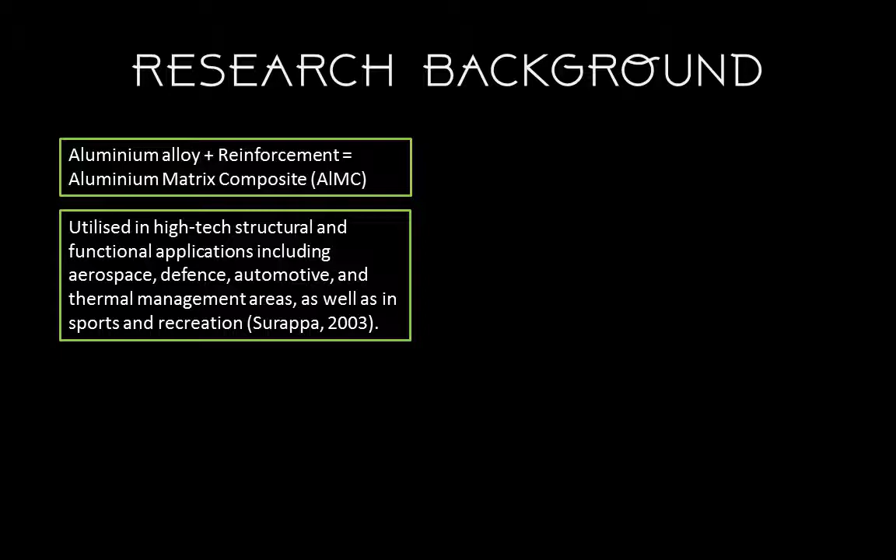Now the question is how to maintain the good standard of aluminium matrix composite. Surely it is to reinforce the matrix with a reinforcing agent that has superior attributes.

Carbon nanotubes have been in the limelight as an ideal reinforcing agent as it is ultra strong because of its ultra small size, enhancing the mechanical properties by transferring loads from the metal matrix to CNT, which is called fine grain strengthening. So the next question: how to fabricate a CNT reinforced aluminium matrix composite that is up to its high standard?

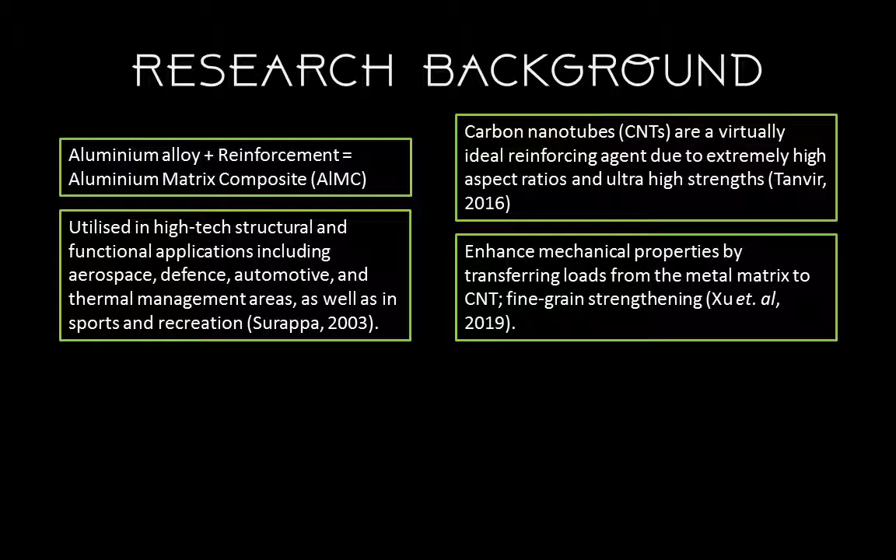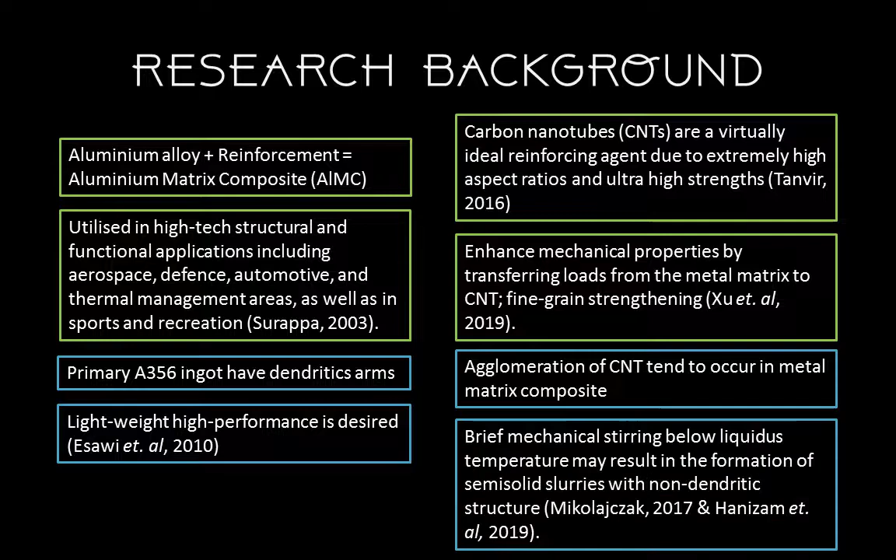CNT tends to agglomerate, and the primary A356 ingot has a dendritic arm structure, while lightweight and high performance is desired. Studies from previous researchers show that mechanical stirring will solve the above problem.

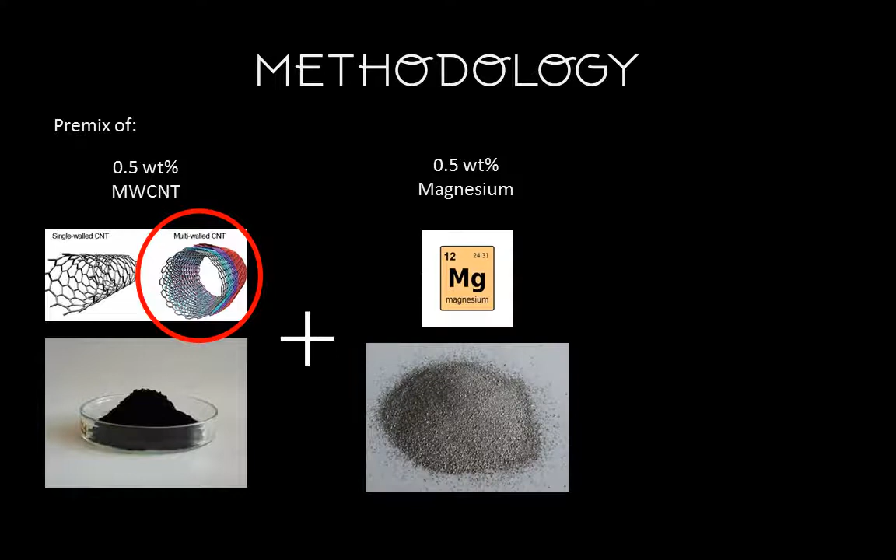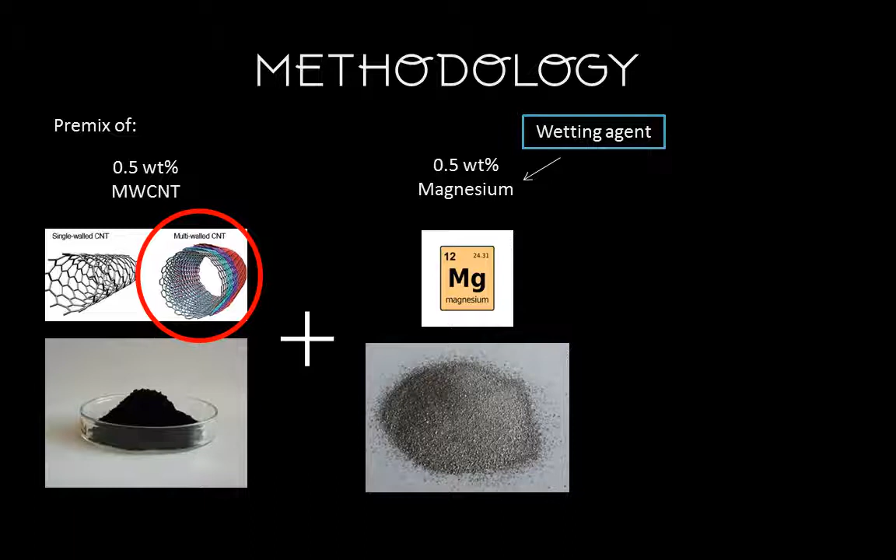Now we will move on to the methodology. First step is to premix 0.5 weight percentage of multi-wall carbon nanotubes with 0.5 weight percentage of magnesium. The purpose of magnesium is as a wetting agent to bridge the carbon nanotubes to the metal matrix, and both materials will be encapsulated in aluminium foil.

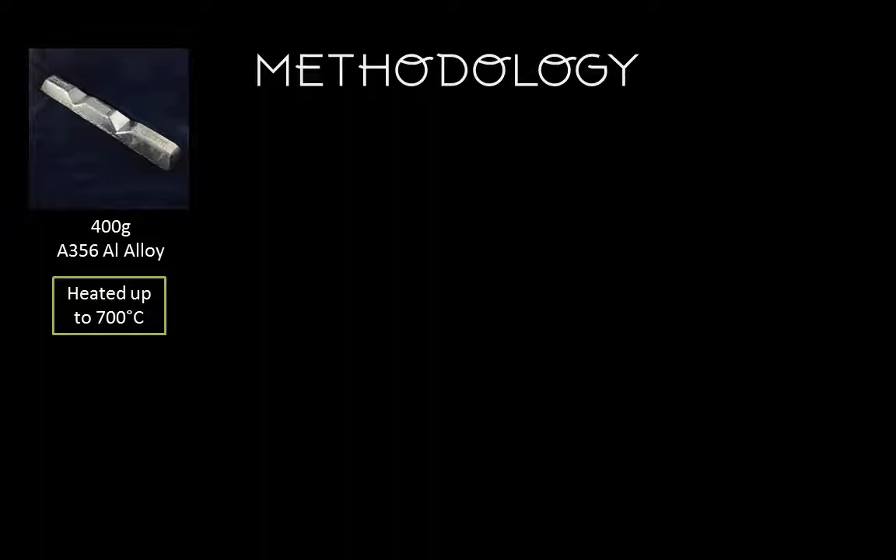The next step is to have 400 grams of A356 aluminium alloy heated up to 700 degrees Celsius before it was brought down to a constant temperature of 650 degrees Celsius. The reason for it to be heated up to 700 degrees Celsius is to ensure that it is fully melted.

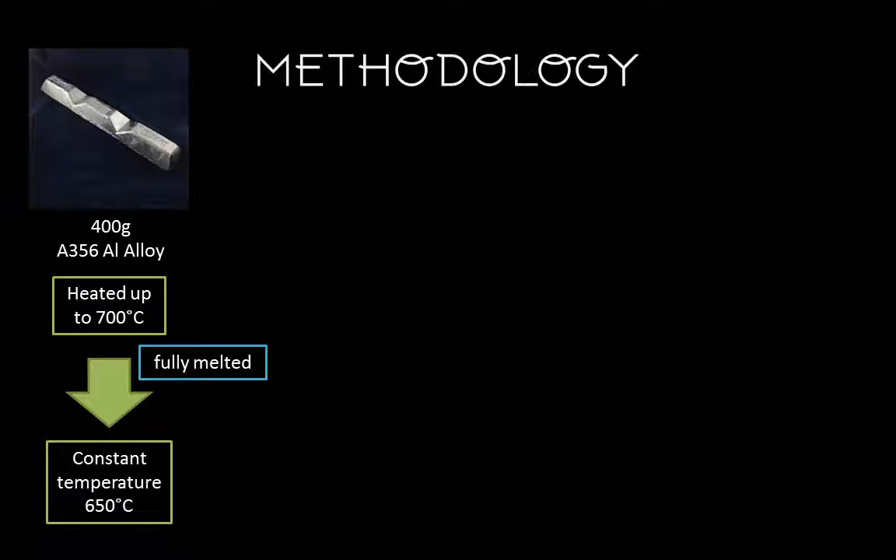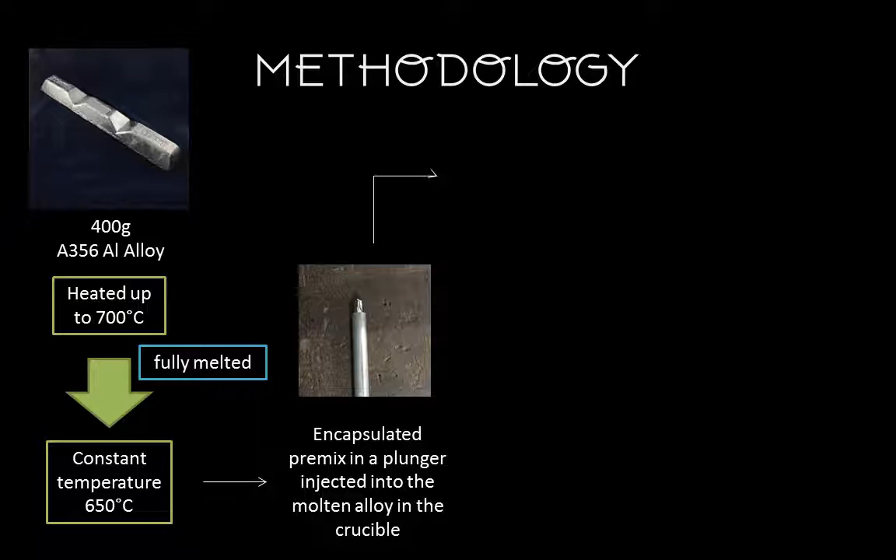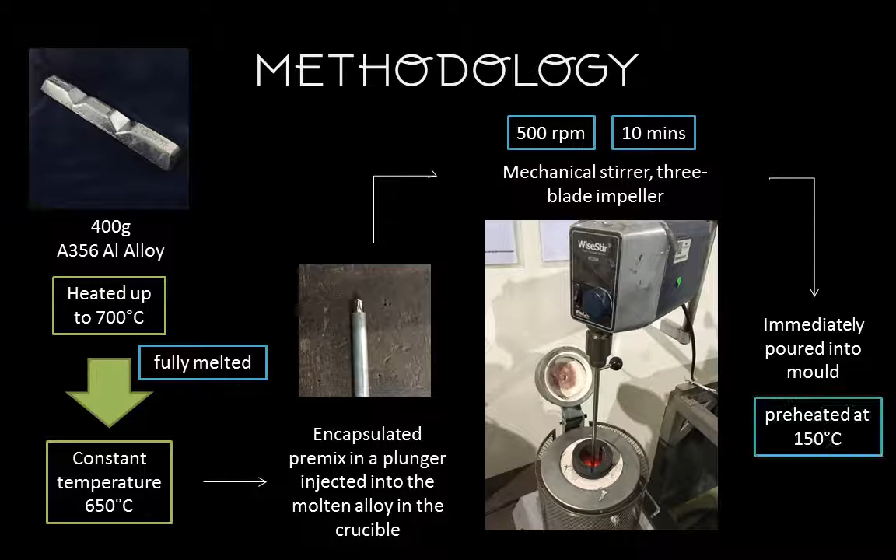The next step is to have the encapsulated premix put into a plunger and injected into the molten alloy in the crucible before it was mechanically stirred using a mechanical stirrer equipped with a 3-blade impeller for 500 rpm. After 10 minutes, it will be immediately poured into a mold which is being preheated at 150 degrees Celsius.

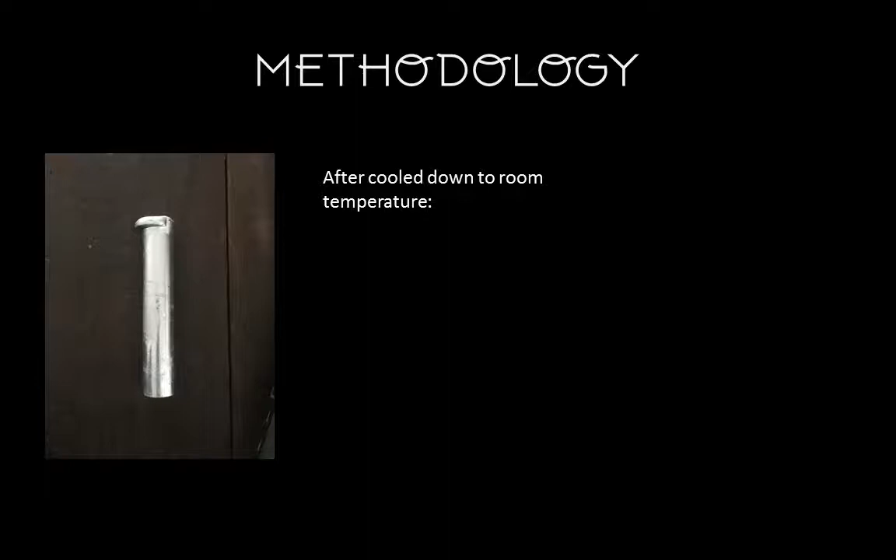Next is to prepare the sample. After it was cooled down to room temperature, it will be ground, polished, and etched using Keller's solution for 10 seconds so that it can be observed under the optical microscope.

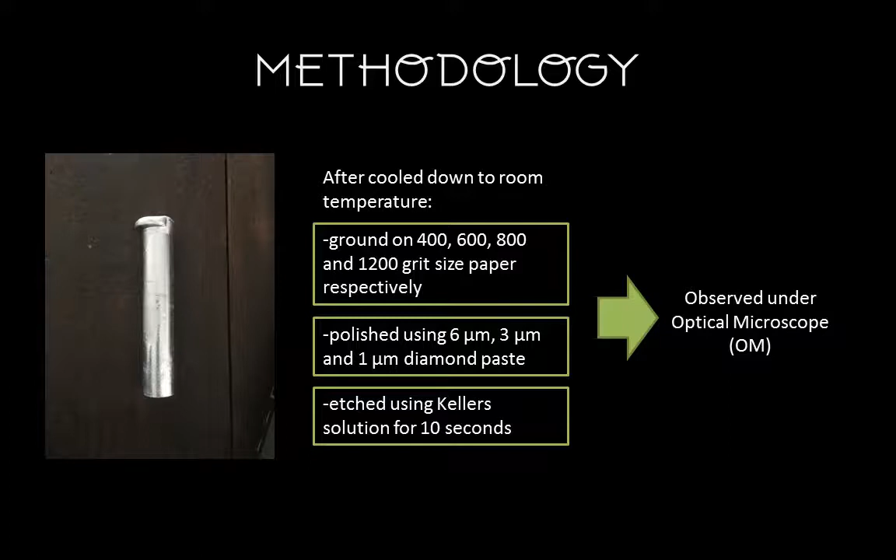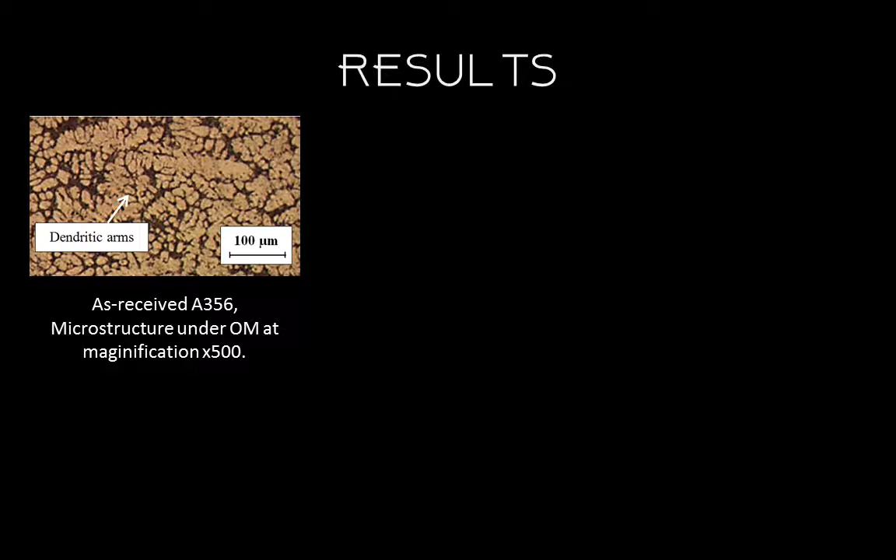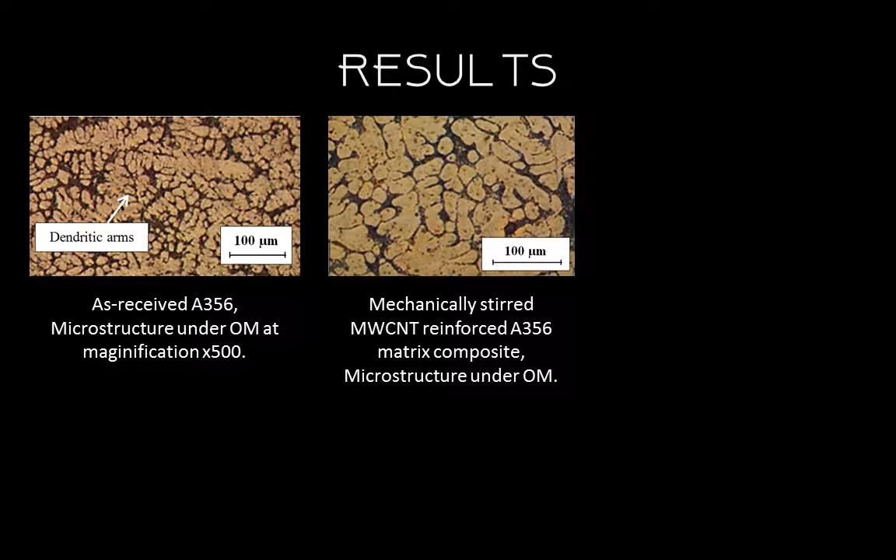Now let me show you the results. The first picture is the as-received A356 microstructure under OM at magnification of 500 times, while the second picture is the mechanically stirred MWCNT reinforced A356 matrix composite microstructure under OM. Did you see the difference?

The first picture shows the common alpha aluminium morphology with dendritic arm microstructure, while the second picture shows a non-uniform rosette-like microstructure, proving that the dendritic arms are broken after being subjected to external mechanical force.

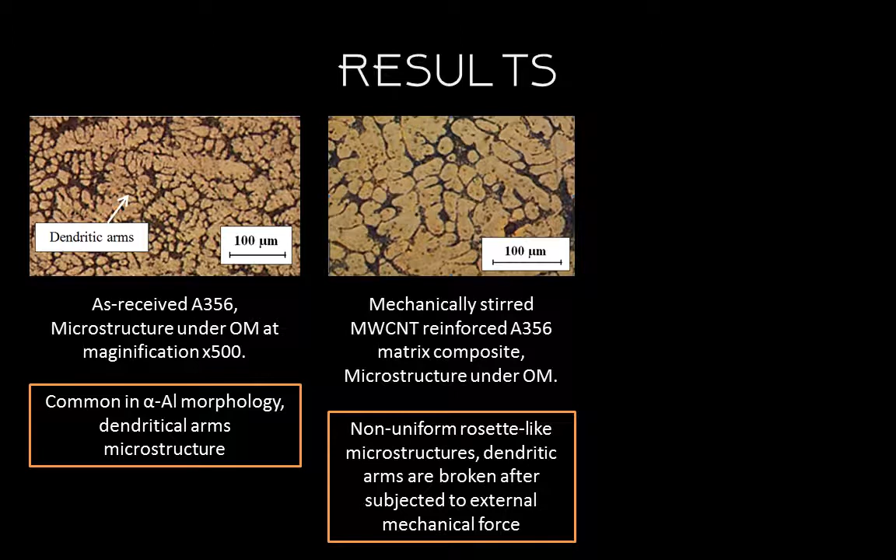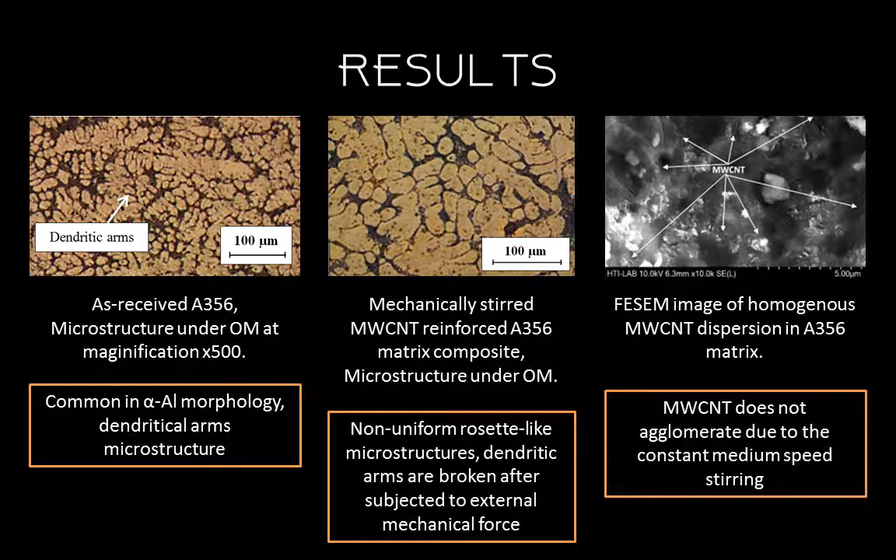The third picture is the FESEM image of homogeneously dispersed MWCNT in the matrix, proving that the MWCNT does not agglomerate due to the constant medium speed. It can be concluded that the fabrication of the composite is successful.

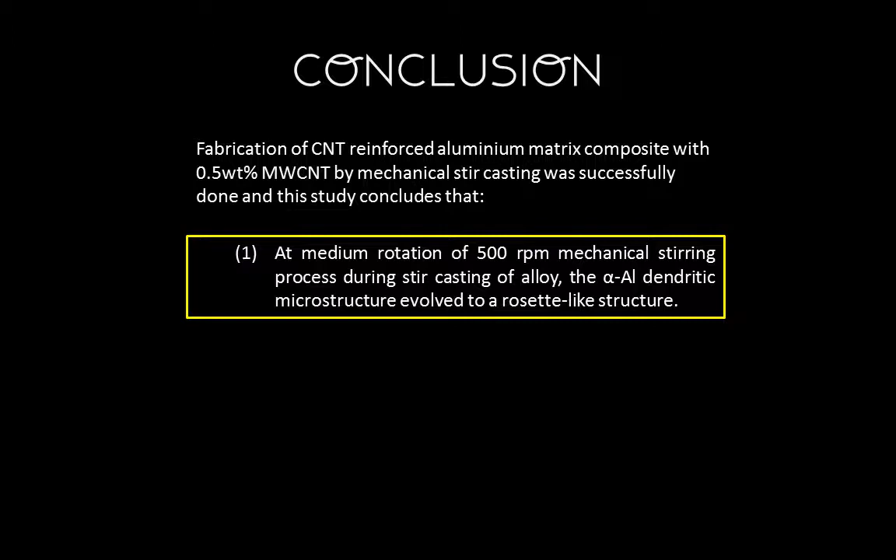At medium rotation of 500 rpm mechanical stirring during stir casting, the alpha aluminium dendritic microstructure evolved to a rosette-like structure, and MWCNT is homogeneously distributed throughout the A356 aluminium matrix.

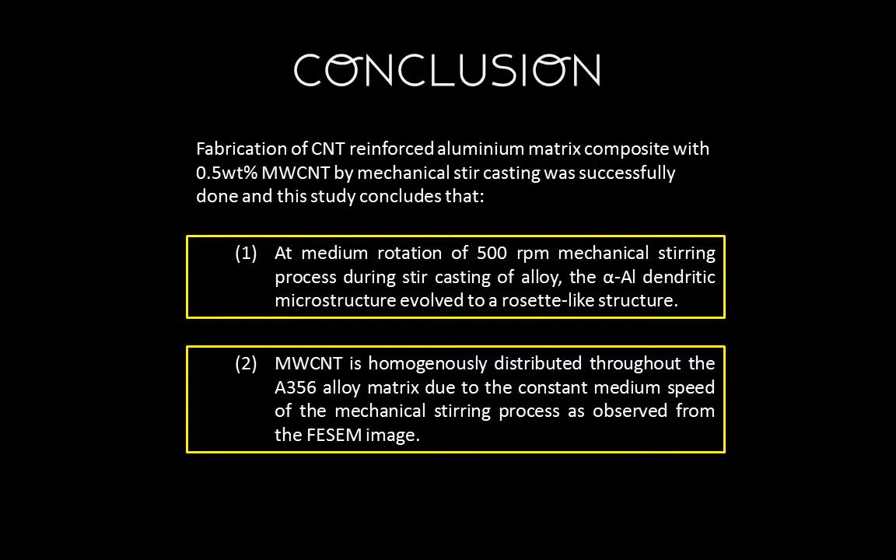The findings in this research manifest abundant opportunity for CNT reinforced aluminium matrix composite, as these high performance composites can be achieved after eliminating the two problems in fabrication with a relatively low cost, which is using mechanical stirring.